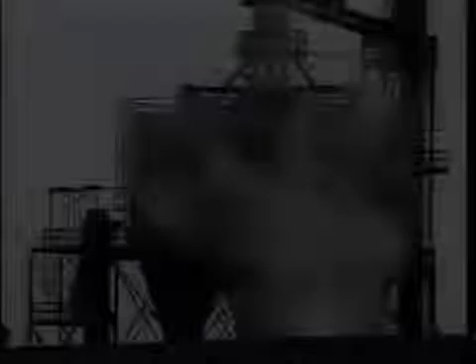Industrial plants need steam for heating and other processes. Boilers are commonly used to provide this steam. You may be called on to operate the boilers in your plant. The first step towards safe and productive operation of boilers is a good working knowledge of boiler fundamentals.

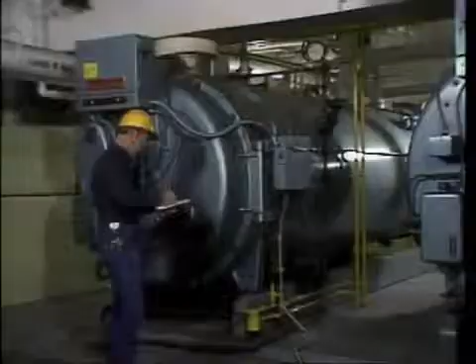The function of boilers is to produce steam. Steam is produced by heating water to its boiling point. When water reaches its boiling point, it changes from a liquid to a vapor. It's this vapor that we call steam. So basically, to produce steam, you need two things: water and heat.

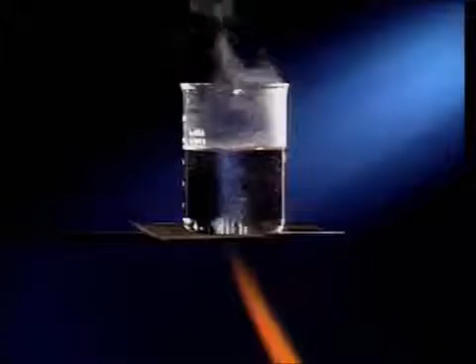To generate that production, boilers rely on the process of combustion. That is, they burn fuel to provide the heat required. In simple terms, there are four requirements for combustion, which we'll illustrate on a combustion triangle.

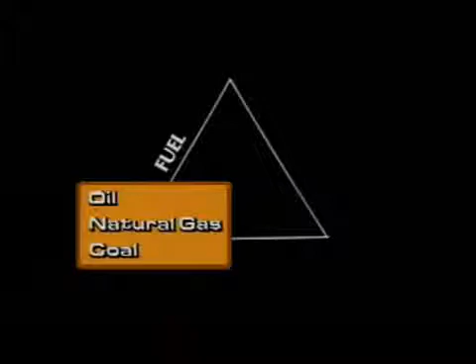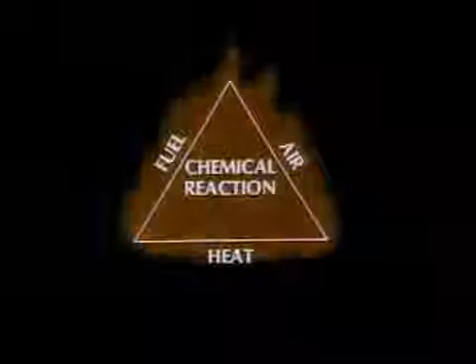One requirement is fuel. Most boilers burn oil, natural gas, or coal. The second requirement is air. More specifically, air contains the oxygen needed for combustion. The third requirement is heat. Heat is required to raise the temperature of the fuel-air mixture to a point where a chemical reaction, or ignition, takes place. The chemical reaction is the fourth requirement. If any one of the requirements is missing, combustion will not occur.

The two requirements for steam production are water and heat. The heat is provided by combustion. Boilers are designed to allow the requirements for steam production and combustion to come together. Let's see how by looking at a boiler's basic operating principles.

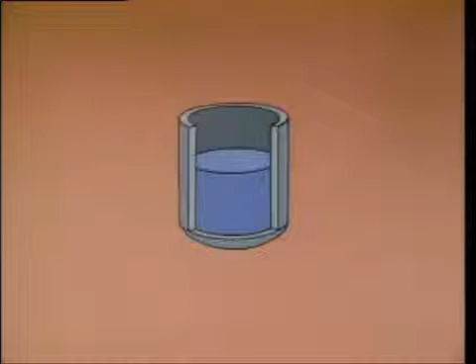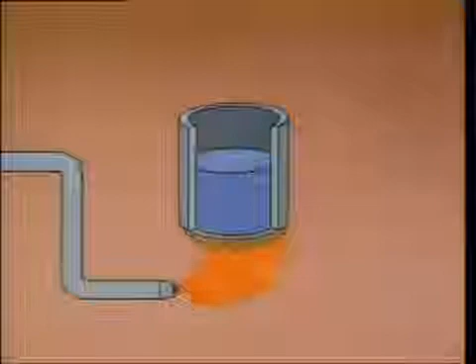We'll assemble a simplified boiler. This is a container or shell, with water in it. The water takes care of one of the requirements for steam. We'll also add a pipe to provide a continuous supply of fuel to the combustion area, that is, the area beneath the shell. Heat from the flame satisfies the second requirement for steam production. As the shell heats up, heat is transferred from the shell to the water, and the water boils, producing steam.

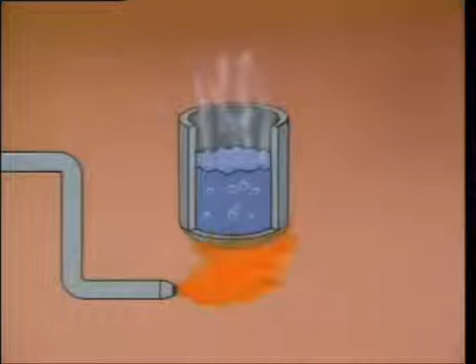But a boiler modeled on this example won't work for industrial applications. First of all, the shell is open to the atmosphere, so there's no way to collect the steam. In addition, as the water boils to steam, there's no way to replenish it. Without water, the shell could overheat and be damaged. Given these factors, we'll have to make some changes.

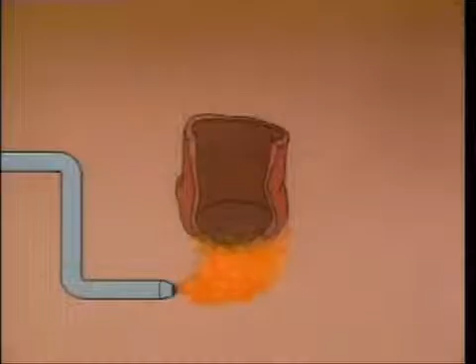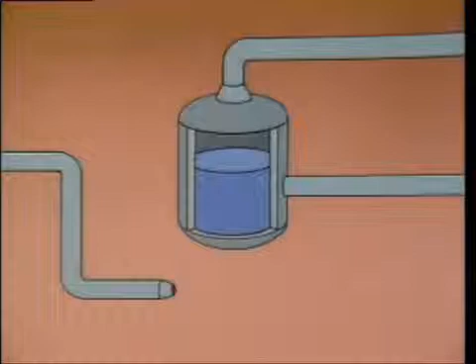First, we'll cover the shell to prevent the steam from escaping. Then we'll add a steam outlet line to collect the steam and route it to where it can be used. We also need a way to supply water to the shell so it won't boil dry, so we'll add a feed water line. It will provide a continuous supply of water to replace the water that's changed to steam. Now we have a boiler that can heat water, produce steam, and route it out of the shell to where it's required. But this design is still not as efficient as it could be.

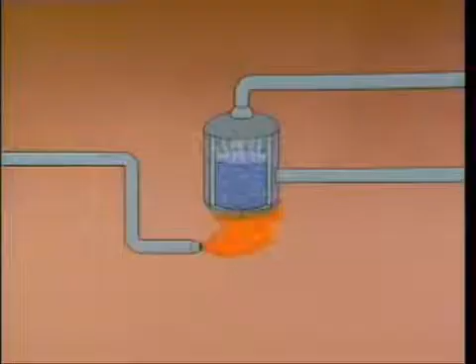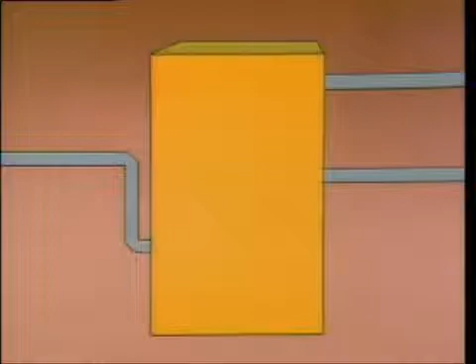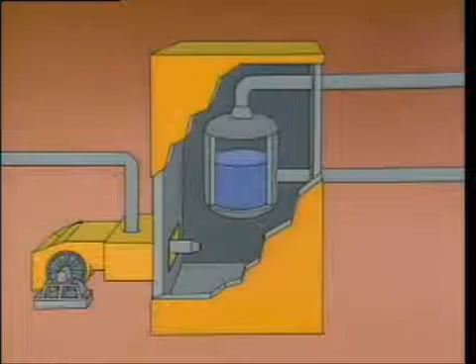Can you think of a reason why not? With this design, much of the heat in the combustion area escapes to the atmosphere. This heat is wasted because it doesn't go toward the production of steam. This boiler can be modified further to make it more efficient. By adding an insulated casing, we can minimize the heat loss, but this creates another problem: the flame goes out because the casing cuts off the source of air. To correct this, we'll add a fan to supply air to the boiler and an outlet to remove combustion gases.

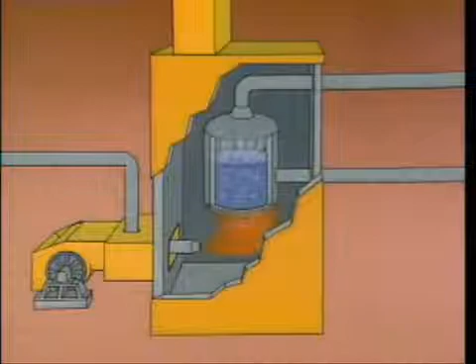Although this design is still greatly simplified, now we at least have a boiler that provides a constant supply of steam efficiently. In this topic, we saw the basic requirements for steam production and combustion. We also put together a simple boiler that operates to meet these requirements and produce steam. Let's take a minute now to try some practice questions.

Heat transfer is a natural process that occurs anytime there's a difference in temperature. Heat naturally transfers from a hotter object to a colder object. Basically, heat transfer occurs in three ways: radiation, convection, and conduction.

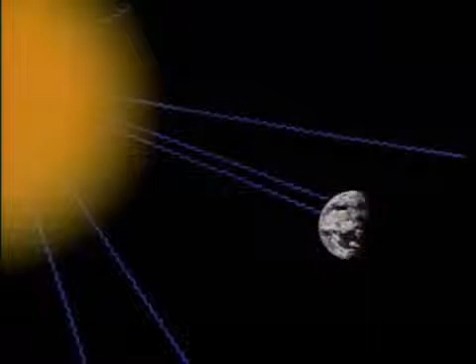Radiation is a process in which heat is transferred through electromagnetic waves. All matter gives off some radiant energy in the form of electromagnetic waves, but the best example is probably the sun. It gives off vast amounts of radiant energy.

As the sun's radiant energy travels through space, some of the electromagnetic waves contact the Earth. Some of these waves are reflected back into space, but others are absorbed by the Earth. Only the waves that travel in a direct line of sight between the Earth and the Sun come into contact with the Earth. The energy contained in the waves is absorbed by the Earth as heat that warms the Earth. The amount of heat transferred depends on the number of electromagnetic waves absorbed.

A second type of heat transfer is convection. Convection is the transfer of heat within a fluid, that is, a liquid or a gas. It's caused by a mixing action within the fluid.

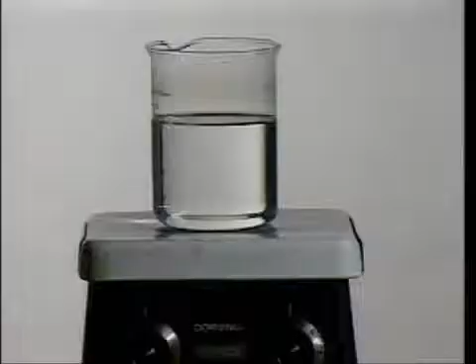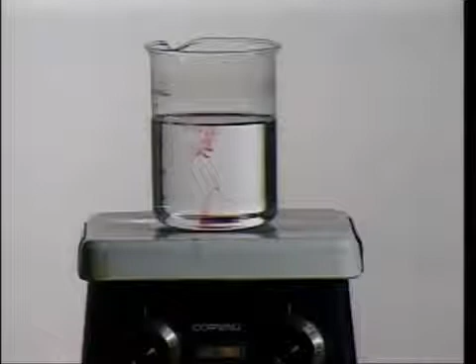To demonstrate convection, we filled a beaker with water and set it on a hot plate. We'll also add some dye to show the mixing action. As the bottom of the beaker heats up, the temperature of the water closest to the bottom increases. As the temperature increases, the water becomes lighter or less dense, so it flows upward. The warmer water mixes with the cooler water near the top of the beaker, and heat transfer occurs.

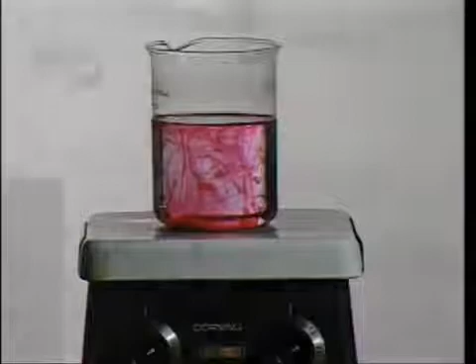This type of heat transfer is known as free or natural convection because the movement of the fluid occurs naturally. Convection heat transfer that's produced mechanically is called forced convection. Many buildings have forced convection heating systems. These systems use fans to force warm air into rooms. The warm air then mixes with the cooler air in the room, and convection heat transfer occurs.

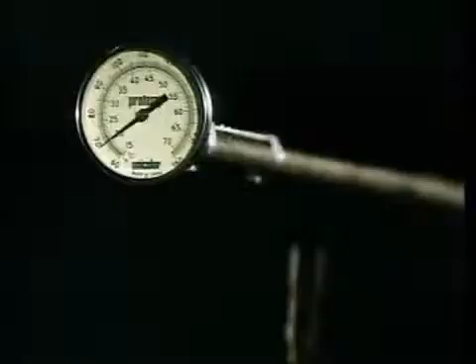A third type of heat transfer is conduction. Conduction is the transfer of heat through a solid object or between two objects as a result of physical contact. For example, if we heat one end of a steel rod, the other end will heat up as well. The heat transfer from one end of the rod to the other is due to conduction.

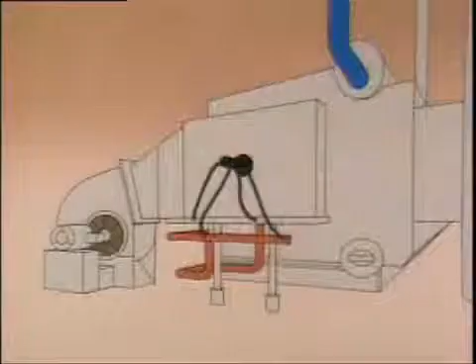We've now seen the principles behind radiation, convection, and conduction. The three main types of heat transfer are radiation, convection, and conduction. Each of these types is involved in transferring heat from the burning fuel to the water in a boiler. To see how, we'll use this example.

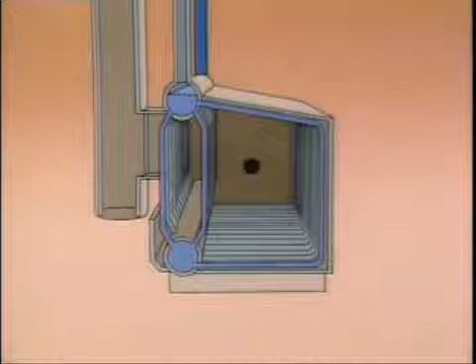This type of boiler is called a water tube boiler, but the heat transfer principles at work apply to just about all boilers. The boiler has a series of tubes and two drums which distribute water to the tubes. The tubes form a wall around the combustion area. This is the area where heat is generated.

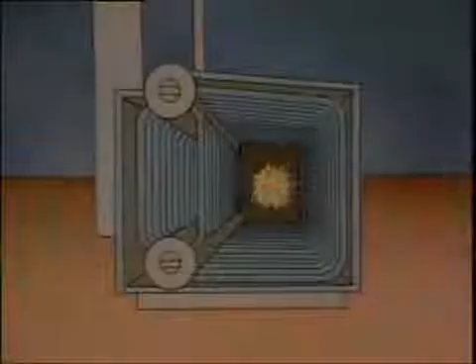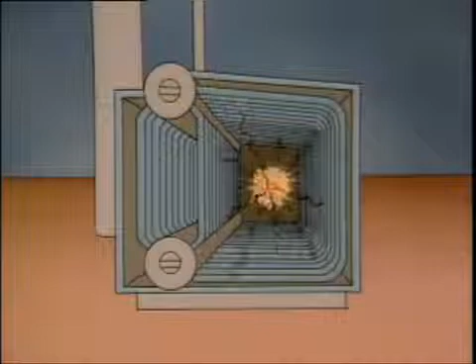When fuel burns in a boiler, radiant energy in the form of electromagnetic waves is produced. These waves travel through the combustion area. The waves in a direct line of sight with the tubes make contact with the outer tube surfaces, and the tubes absorb heat. This is radiant heat transfer.

The burning fuel also produces combustion gases. As these hot gases pass through the boiler, they transfer heat to the tubes as well. This is convection heat transfer.

As the outer surfaces of the tubes absorb heat, conduction heat transfer occurs. Heat is transferred from the outer surface to the cooler inner surface. Then heat is transferred from the inner surface to the water flowing through the tube.

Convection heat transfer also occurs as the warmer water mixes with cooler water. When enough heat has been transferred to raise the water temperature to the boiling point, steam is produced. When a boiler is working properly, the heat produced by the burning fuel will be readily transferred to the water in the tubes. However, there are problems that can interfere with heat transfer. One of these problems is a condition called scale.

Scale is the buildup of solid impurities on boiler components that contain water. The boiler's feed water supply may contain impurities. These impurities coat the surfaces, insulate them, and restrict their ability to transfer heat. If the surfaces can't transfer heat to the water, the tube can overheat and rupture.

A heat transfer problem can also occur if the feed water supply stops for any reason. Without a continuous supply of feed water, the boiler may boil dry. With no water to remove the heat, the tube metal rapidly overheats and severe damage may result.

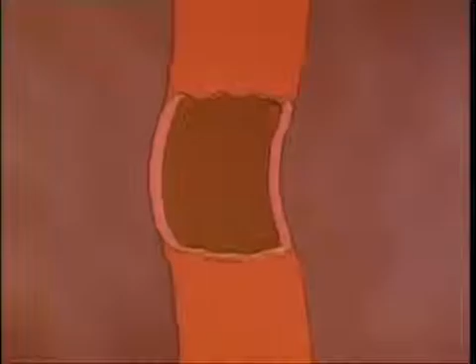In boilers that burn coal or oil, another problem that can affect heat transfer is the buildup of soot. Soot's created by ash and unburned fuel particles in the combustion gas.

In this topic, we covered heat transfer. We looked at the major types of heat transfer, and we saw how heat transfer occurs in a boiler. We also looked at a few typical heat transfer problems. Now let's try some practice questions.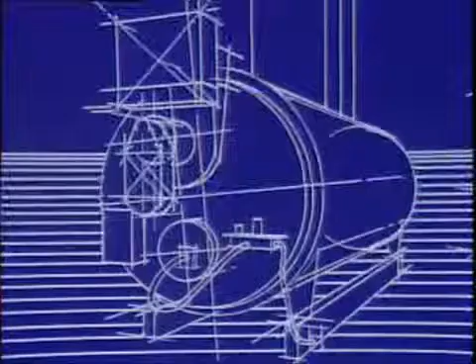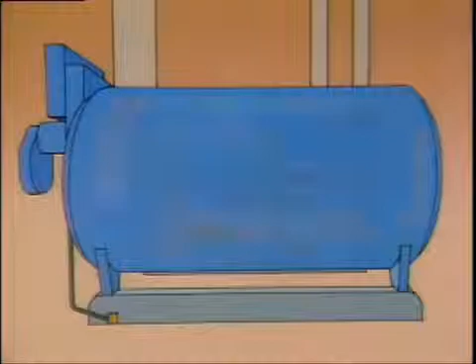Basically, fire tube boilers route hot combustion gases through metal tubes. The tubes run through a shell filled with water. Fire tube boilers vary in design, but most operate under similar principles. The combustion area for this one is here.

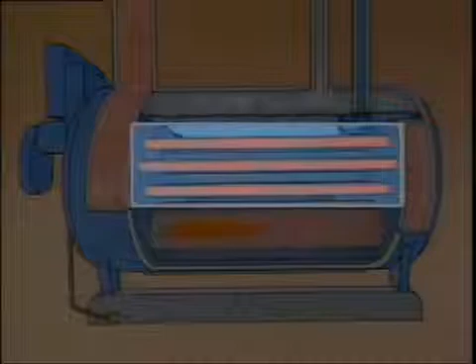A group of horizontal fire tubes routes combustion gases through the boiler. There's also an outlet for the gases, a feed water line, and a steam outlet line. During operation, water enters through the feed water line. The water level is maintained above the fire tubes to protect the tubes from overheating.

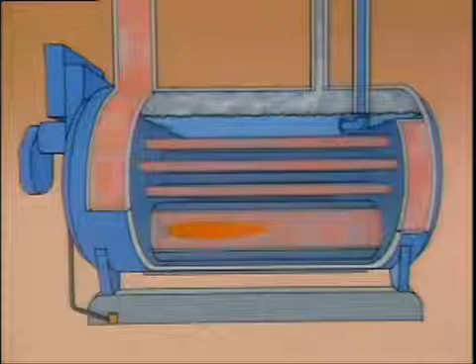Fuel and air enter the combustion area. The burning fuel transfers heat to the water in the shell. The hot gases flow through the fire tubes, and additional heat is transferred to the water surrounding them. Each time the gases are routed through the shell, it's called a pass.

The gases pass through 2 times in this example, so it's a 2-pass boiler. The combustion gases flow out of the boiler here in this example. As the water in the boiler is heated, some of it turns to steam. The steam-water mixture is lighter than the cooler water in the boiler, so it tends to rise.

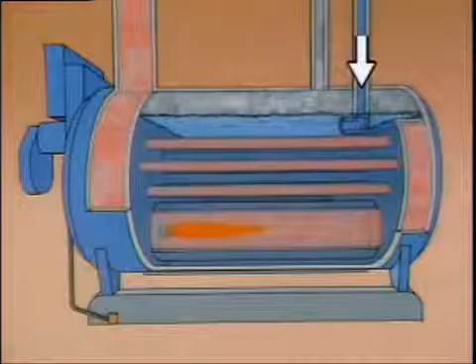Steam collects above the water level. Then it flows through the outlet and into the plant. The feed water, which is cooler and heavier than the steam-water mixture, flows to the bottom of the boiler. It's heated in the combustion area, and the cycle continues.

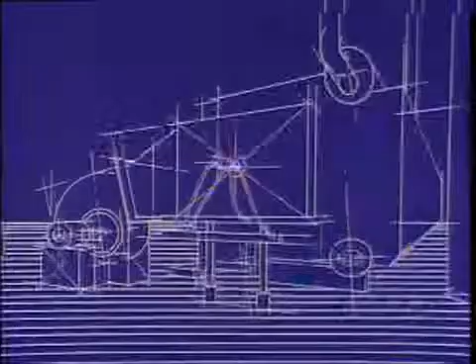Generally speaking, water tube boilers use tubes to route water and steam through the boiler. The combustion gases flow past the outside surfaces of the tubes. Let's examine this principle in more detail. Water tube boilers may vary in design, but most of them operate in basically the same way.

This particular boiler consists of a series of water tubes and 2 drums. The drums distribute water to the tubes. The water tubes connect the drums and form a wall around the combustion area of the boiler. This is where heat is generated.

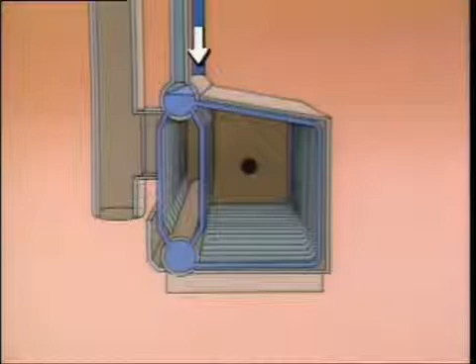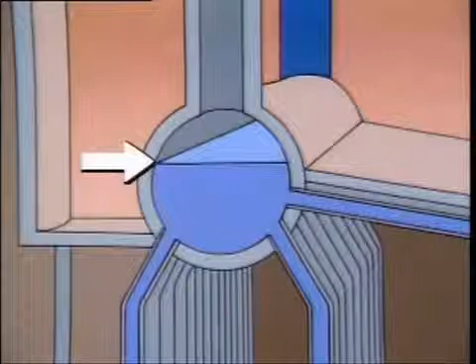Water is fed into the upper drum through a feed water inlet line. The water tubes and the lower drum are completely filled with water. The upper drum is only filled to a certain level. This provides space for steam to collect, so the upper drum is often called the steam drum.

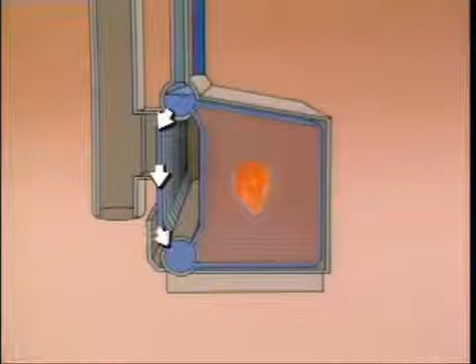As fuel is burned in the combustion area, heat is transferred to the adjacent water tubes. The combustion gases then flow out of the boiler. Water circulates from the upper drum through the water tubes and into the lower drum. The lower drum is often referred to as the mud drum.

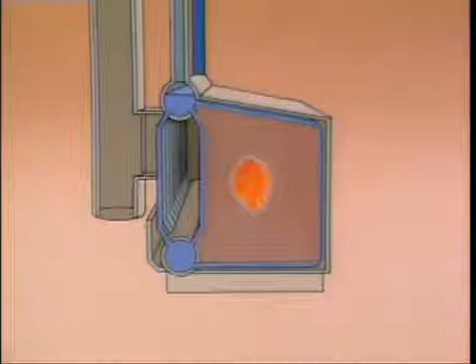From the lower drum, the water is distributed to the water tubes surrounding the combustion area. As the water in the tubes is heated, a steam-water mixture is produced. The steam-water mixture enters the upper drum. The steam is separated from the water and routed through the steam outlet.

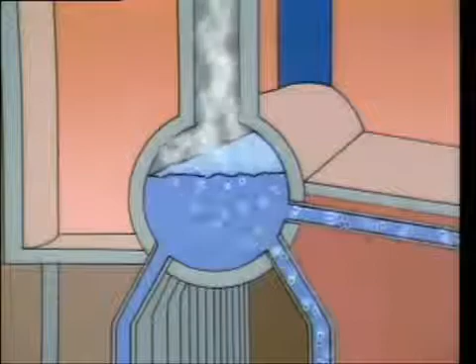In this topic, we looked at the 2 main types of boilers, fire tube boilers and water tube boilers. We saw basically how they're designed and how they operate. At this point, let's try some practice questions on fire tube and water tube boilers.